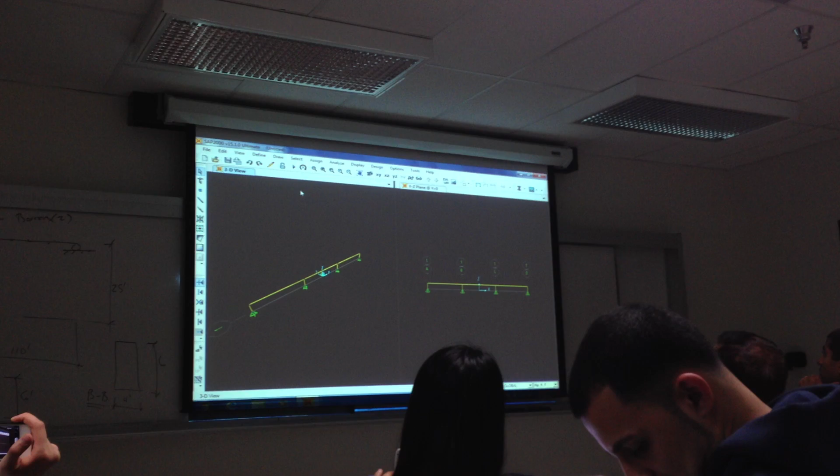Are we okay? All right. So I'll get rid of this one, especially because I'm not interested in the out of plane motion. So I click that off so I only see one picture. Now I go to view, click on show grid if you don't want to see all those A's, B's, C's, and D's, turn that off.

Zoom in a little bit, start rolling my mouse. And then obviously here we don't have columns, so right away I can just circle, grab that one and that one. It doesn't matter if I grab joints as well, it won't delete joints that are part of another member, but hit delete and then those are gone.

We want to see the nodes. So if we go to view, set display options, turn off invisible. Now we can see the nodes. The lengths aren't right yet.

Let's do that before we create the sections. This length is 150. So what I'll do, so they don't have some kind of mirror image, I could do both of these at the same time, one moving to the right 40, one moving to the left 40, but I don't know how to tell it to do both at the same time.

So I have to do one at a time. Select edit, move, and move 40 in the X direction, that joint. And then this one will do the exact same thing, move it to the minus 40.

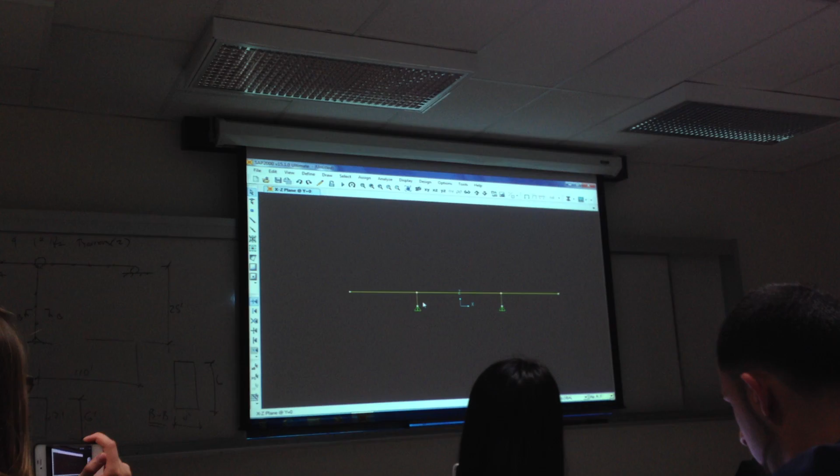I can see it a little more. So we have to move this one down by 10. So I click on that joint or circle it. It says down here 1 point selected. Edit, move, and make sure that it's showing still what I typed in before. So you got to zero that one out, and then on Z put minus 10. Okay, so at least all the lengths should be right.

So that's about how fast it is to create the geometry of a model. So you can right click and check, that's my preferred way. Go to location and it says that was 110. Right click on this one and the location is 150. So far so good, and this one says 110.

This column here is 35 feet, and then the next one should be 25 feet. Okay, so that's good. Obviously, there's no reaction here, that's a long cantilever, so we need to do something about it. We need to make that a roller.

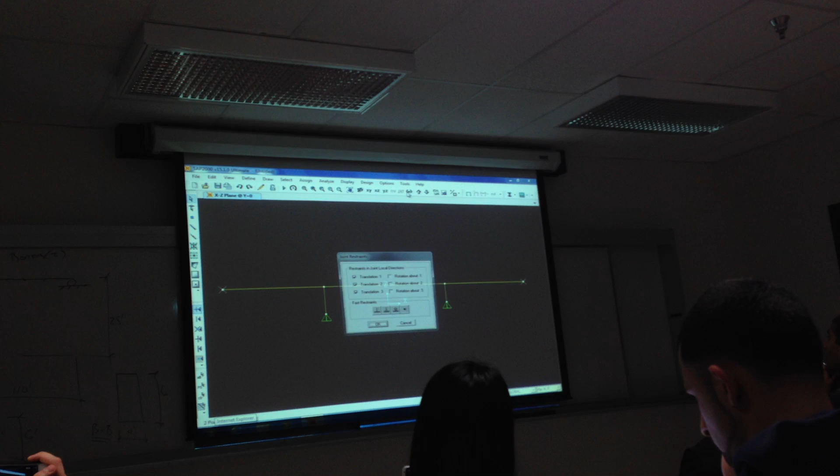So now you can grab this joint and this one. Down here it says 2 points selected, and say assign joint restraints. And what we're going to do is restrain. The X is what we don't want to restrain because it's a roller, we want it to be able to move in the X direction. Otherwise, it won't feel the earthquake at all.

We want the Y lateral. The Y is going in and out of the page, we want to restrain that. And the Z is vertical and sitting on something, so we want to restrain that. The Y, so that's fine. Rotation about the X, I want to restrain, I don't want it to turn. Rotation about the Y, I don't want to restrain, that's around the Y so it should be able to rotate. And then about the Z, it needs to be restrained.

So when we say OK to this, we should get the right icons which indicate rollers. We have a fixed condition here. So click on this joint.

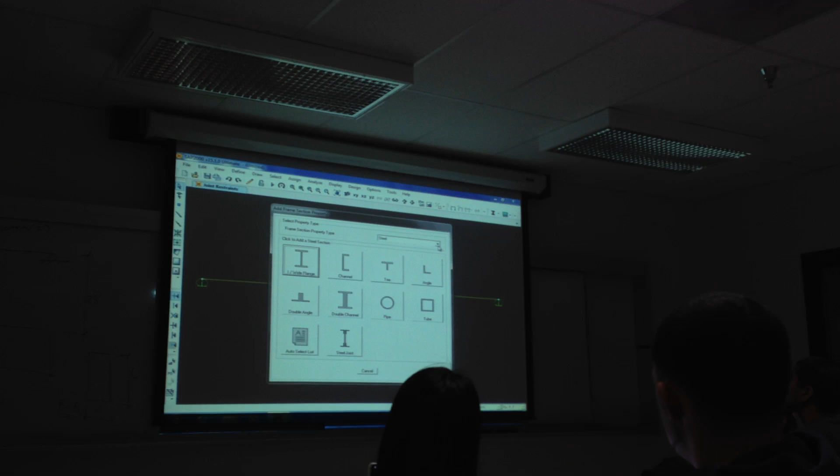So we're in feet units right now. Define section frame. Add new property. If you just leave it as steel, it doesn't... I don't like how this version does this, but if you go to concrete, it has some solid sections.

So let's go to tube first. We're using, I'll just assume that this material property is fine. It's a 4,000 psi concrete. If you have different concrete, you can create your own material or copy that material, modify it as needed, modify the modulus of elasticity. So here I'll put SUP for superstructure for the bridge itself. And then we want to change the depth to be 6 feet.

The overall width is 40 feet for this section. Flange thickness is 1 foot, and the web is 2. So top and bottom are 1, the sides are 2, the overall width is 40, and the depth is 6. That's this section here, right? It's superstructure. So we say OK.

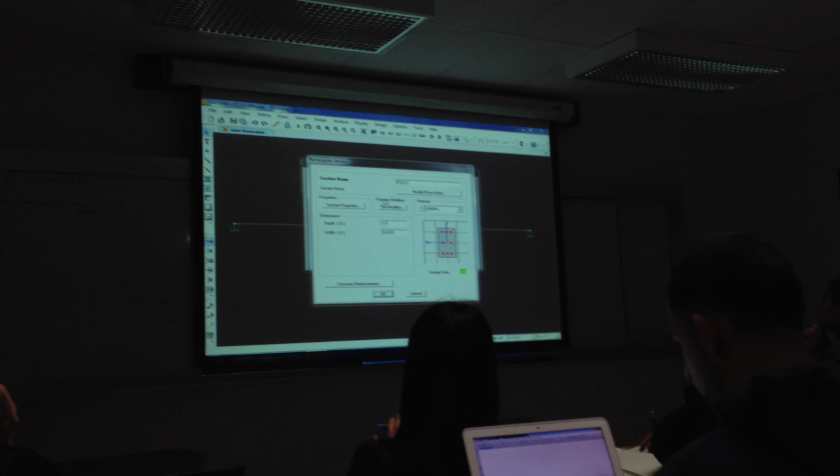So don't forget, after you create these sections, to assign them to frame members. It's easy to create sections and forget to assign them, so it just has the default. So now say add new property, rectangular. This is for, we'll call a column, COL.

And then, so you have to be careful which one's which direction. In the 2 direction, I think that's our longer one, that's 6 feet. And we can verify this in the depth is 4. That's the wrong way. Put it 6 and 4 this way. Okay. Because I know moment 3-3 will be the moment in this direction.

And looking at this, this is... oh, I was right the first time. 4 versus 6. Okay. So that is correct. So it's the weak direction in this direction. Okay, that's called column. And again, it's using the 4,000 psi concrete.

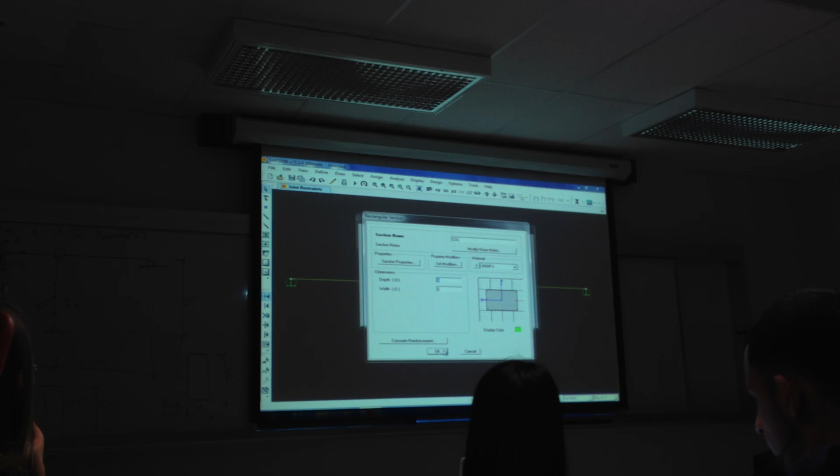Now you want to assign it, so I can just highlight around this. And right now we only have 3 members. We're going to split it up into 4 members. So let's say assign, frame, section. I'm going to select superstructure. So now it says SUP for all those.

And then for the columns, grab those and say assign, frame, sections, column.

Now if we wanted to define a different material property, you go define materials. Here's the 4,000 psi. So you can look at it and look at the modulus of elasticity. Remember, this is kips per square foot, not KSI. So you could get out, it says you could do it in units, I usually do it here. But kips in inches here.

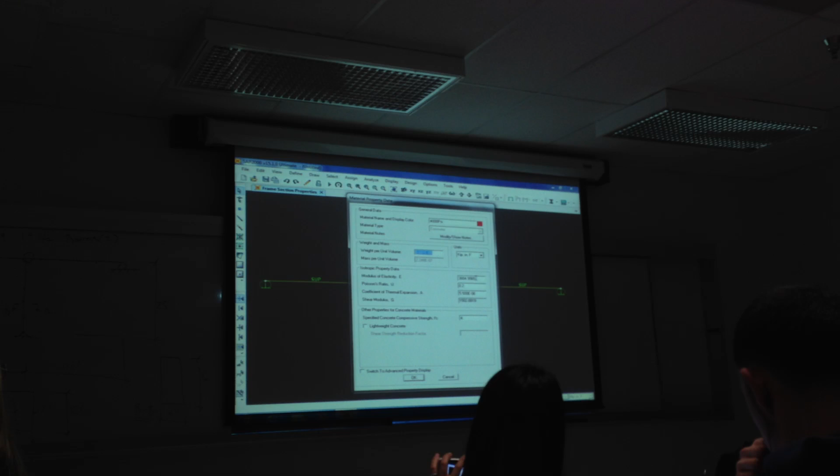Define materials, let's go back. And there's the 3,605 KSI, that's the modulus of elasticity that's found from 57,000 times the square root of 4,000. That's what that number is. So if you had a 5,000 psi concrete, you could find a new number and put it in here, or you could copy this. You could click on add copy of material and call it whatever you want, and then change these numbers.

And then when you go back to the section, when you go here, define frame section, let's say column, modify, you just select the new material you created. You have to create it first. It would just be the modulus of elasticity you would have to change, nothing else, in the way we're using it.

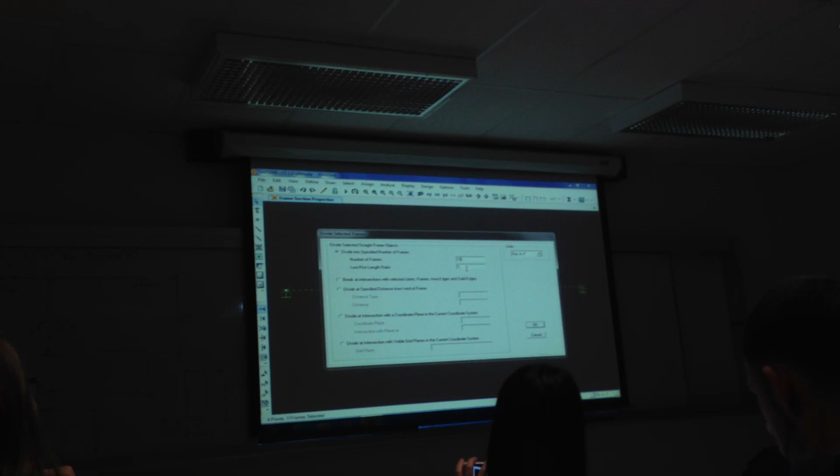Let's add some additional load. Or should we, let's split... let's see what I told myself to do. Okay, let's split these up into members. So 3 frames are selected, the superstructure ones. You say edit, edit lines, divide frame. And you say number of frames, and each one will be the same length, because the ratio of the last to first is 1. So each one will be 10.

Made up of a bunch of members that are interconnected. Columns, we're going to split into, what do we say, 5? Edit lines, divide, and just say 5. Leave that ratio as 1.

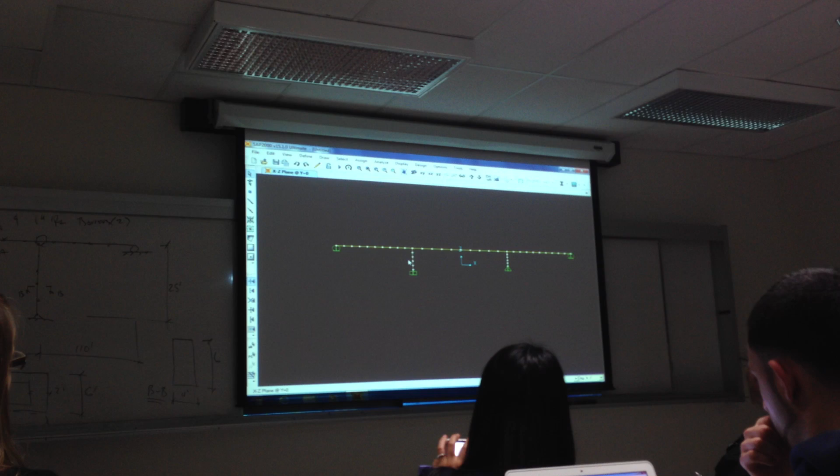Okay, so you can go in and look at them all, right? And then I click this, because we don't want to see that. If you click this icon, it gets rid of the section designation. So we have a lot of members now, and what else do we do?

Let's add some load and mass. We want to add, you tell me, how much I'm going to add, so many kips per foot along the top as a dead load. How much? How many kips per foot?

Two point four. 2.4 kips per foot. Because 35 pounds per square foot multiplied by 40 is 1,400, but that's pounds per foot along the line, right? And divide that by 1,000 to get it into consistent units, so that's 1.4 kips per foot. And I said also add 1 kip per foot along the line with 2 barriers, a half a kip per foot each. So that's, we want to use 2.4, right?

So I'm going to grab all of these, make sure you don't accidentally grab the column ones, zoom in, okay. And it also tells me here 30 frame members selected, so that should be good. Each one's 10, so I didn't accidentally grab the columns. I want to put that on there.

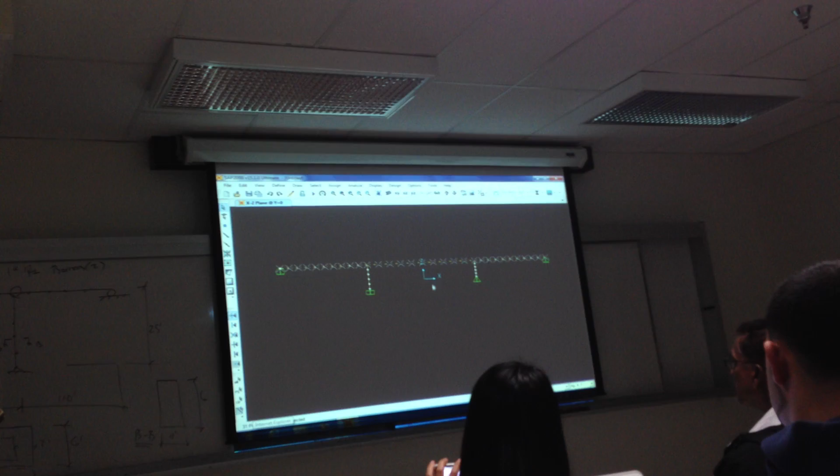And then say assign, frame loads down here. I'll go to distributed. It's going to put it in a dead load case, which is okay. It's add a dead load. We're going to include that. Gravity is the direction, so I don't have to put a negative. And then we just put 2.4 in, right?

Our 2.4 is kips per foot, and we're in kips and feet units, right? So it's showing it being applied there. And I'll click on this, and I don't want to see that.

Let's add the mass also. That's for dynamic considerations. It affects the periods, affects the dynamic response of your structure, so that added mass is there.

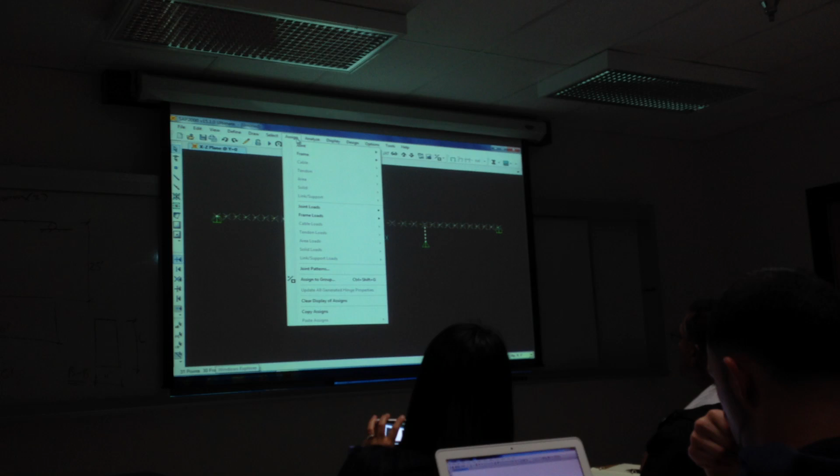So let's put that on there. We'll select again, we're going to distribute it. It's 30 frames selected, say assign. Now you don't go down to frame loads, just go to assign frame, and then over here, you go to assign mass.

We're not lumping the masses in each node, it will do that automatically for us based on what we do. And then this mass should be 2.4 kips per foot divided by 32.2 feet per second squared, divided by gravity. That gives us the mass per foot.

So that's 0.0745. Okay, so that shows it. Let's save it as something.

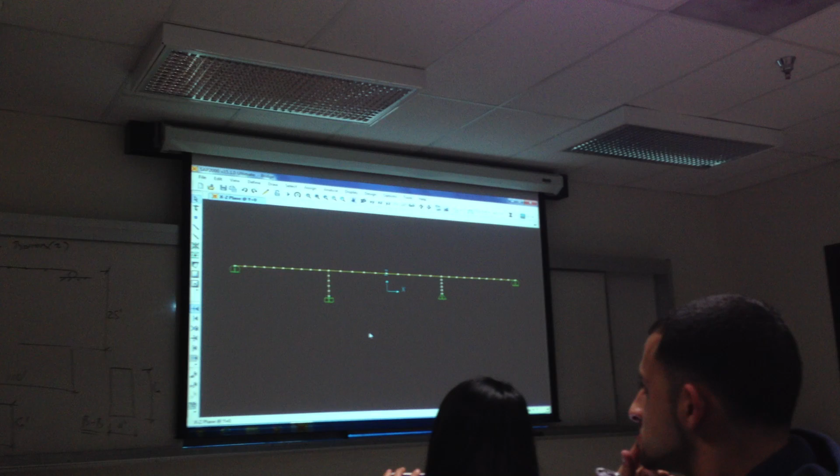Well, we already have this cross section going all the way to the intersection, right? So we don't need to add the total weight like that. We need to add the weight of this hole, and the mass associated with it.

So let's say it goes 6 inches on either side of the column. The column is 4 feet this way. So it's this multiplied by 5 feet. So what is that? Actually, that's quite a lot.

Probably pretty heavy, and it'll be, we'll put it on a node rather than distribute it. We'll put it at the top node. Is that clear what I'm doing?

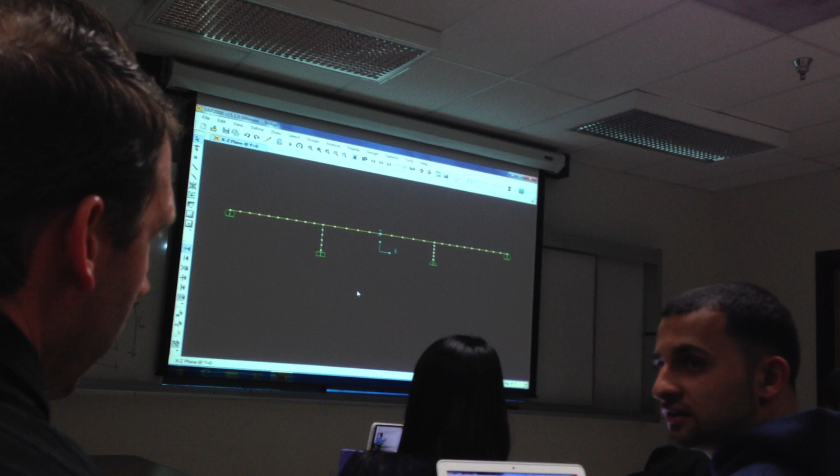No, actually, could you please explain? I just wanted to ask, what is it you're calculating? A solid bent cap. Remember how where the column reinforcement comes up, it's not hollow, the bridge, it will be solid.

Oh, okay, so I'm adding the weight that's not in there right now based on the cross section we gave. Yeah. When you did the frame line mass, did you do the add to existing or did you do the replace? I missed. It didn't matter because we hadn't given it any. Okay, so either one.

Okay, and so it's 40 minus 4, so it's 36 feet. This is 6 minus 2, so times 4 feet. And then the length, the column in this direction is 4 feet, but the bent cap will be another 6 inches on either side, so multiply that by 5.

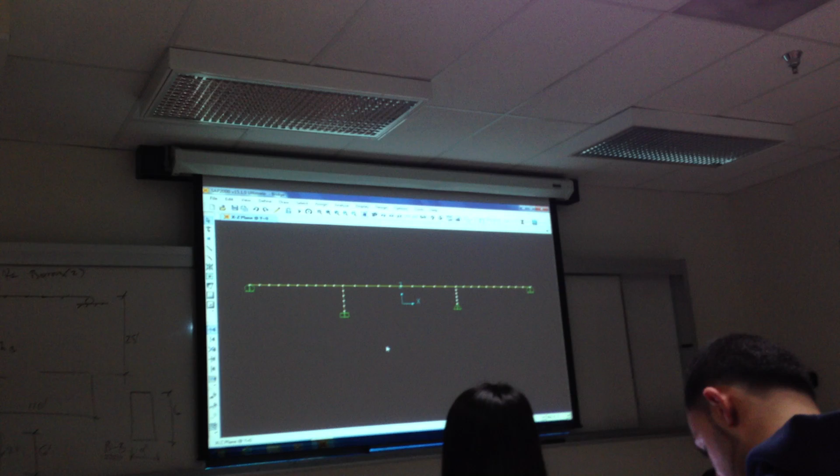So that's 720, multiply that by, it's 150 pounds per cubic foot concrete, and we use 0.15, so this is already in kips. So that's 108 kips that we'll put on it. And we'll do it at both locations, right there and there.

Let's say assign joint loads, forces, and dead. It says replace existing loads, I guess it's okay, we didn't apply any joint loads yet, so it doesn't matter. So you have to think when you do this, because you could be erasing, you could do things separately and adding them. Force in the X, force, okay, force in the Z.

So now this one doesn't say gravity direction, it says force in the Z, so you have to put a negative unless you wanted to pull up on the string. So it's minus 108. There it is, that's good.

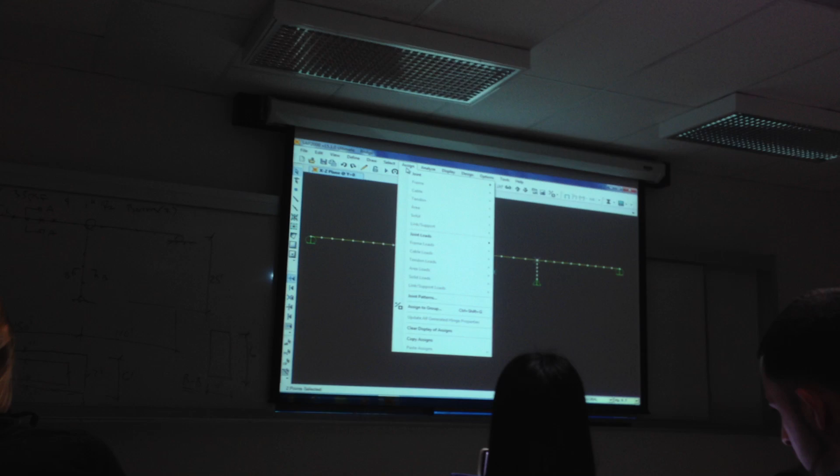And I want to click onto those same two joints and add the mass associated with that. So we're seeing different things here, adding loads and masses to members as well as to individual joints. Then I say assign joint masses, and yeah, it's in all three directions.

Let's see. I do need it in the one direction and three, the two direction. If I'm just looking at in-plane behavior, it doesn't matter, I don't need it, so I can leave that at 0.

And I'm going to take the 108 kips, divide that by 32.2, so it'll be 3.35. There, and there's a 3. If you want to do it in all three, that wouldn't hurt it. Okay.

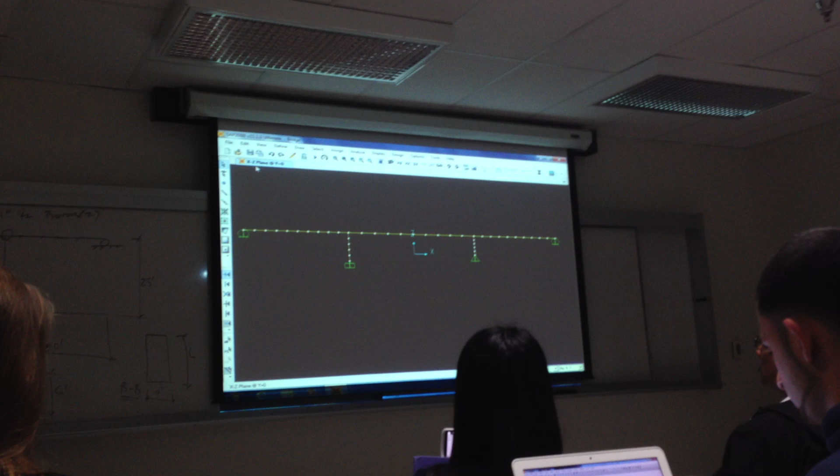Let's run this and see, and we're going to do some more things to it, of course, but let's just do this at the start. You can see that it's going to run the defaults. It'll have dead load and modal analysis, and the modal will tell us the periods of vibration and mode shapes, and that's important to earthquake response. So run now.

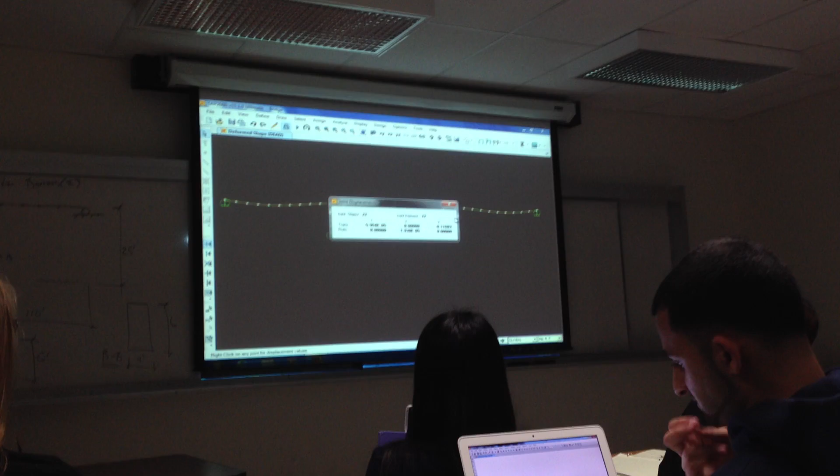This is the dead load. Let's go look here. Just under all the self-weight and the added dead load, we have the maximum displacement is about 0.1 something feet, so that's just over an inch of vertical. So that's reasonable. It's not 20 feet or something. You know you've made a mistake or you have a bad design. But an inch of displacement over 150 feet, that's not a problem at all.

And that inch wouldn't be there because when you build it, you build camber. So you do this calculation, and then you flip this diagram upside down, and you give that to the contractor, and they'll build that in the opposite direction. So under self-weight, it will just come down to the profile. Otherwise, you bounce across these spans.

Okay, now let's look at the modal displacements. So you click here where it shows displacements, and you go from dead, change to modal. And then it says mode 1, you can pick the other ones. Mode 1 is the longest period. That's in this direction. There.

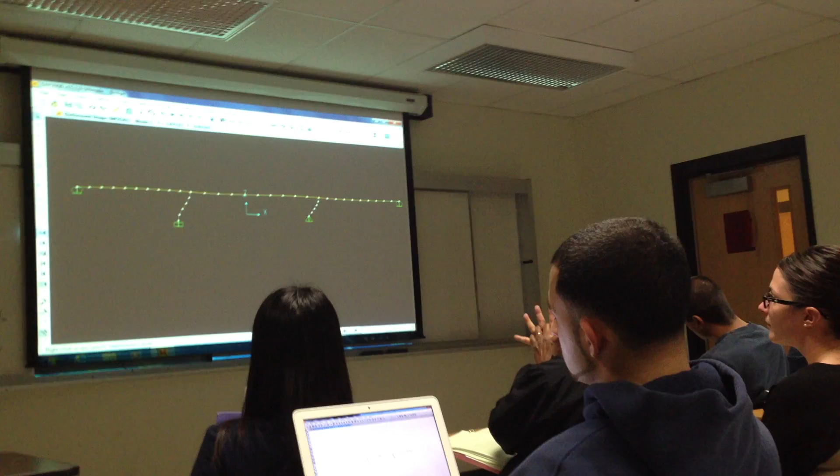On yours, when you're running it, you'll have animation. Somehow I've lost that. We worked on that large 30-story building and it didn't like it, so I don't have the ability to animate, but I know what it would look like. It just goes back and forth like this, the mode shapes. So this is mode 1.

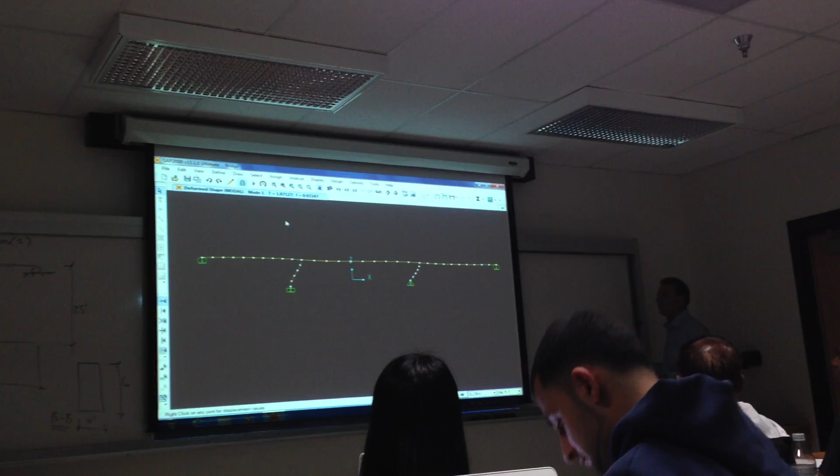It's over 1 second. The first one is just at 1 second, so it's just onto this. So it's pretty low. It's lower than the peak ground acceleration. So the ground acceleration is 0.7 G, and we're way down to 0.3 on the first period. I mean, that's the dominant period.

It doesn't mean the displacements are small, but the accelerations aren't that large. So under maximum credible earthquake, or maximum considered earthquake, the structure acceleration is only 0.3 G, when the ground is hitting 0.7 G. It's a de-amplification rather than resonance. It's like an anti-resonance. It's actually reducing the accelerations. Whereas if the mode 1 period was here in this region, it would be amplified by two or three times.

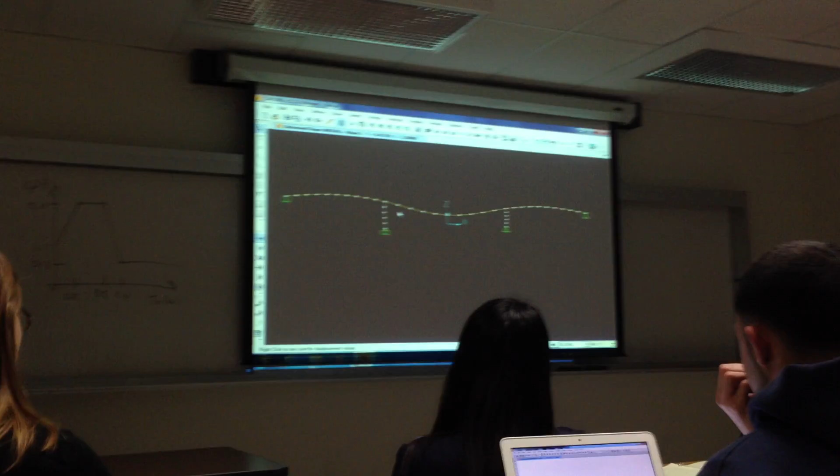Okay, but that's mode 1. And mode 2, look at that. That's this type of displacement shape. That's the second mode. It's 0.45 seconds. So that's way up here. So the second mode will have very large amplification, the largest possible based on our chosen ARS curve.

Mode 3. Now mode 3 you can't see, and that's because it's probably going in and out of the page. If we rotate this, you would see that. Let's see. Maybe 3D. I can rotate it. Yeah, so it's moving horizontally.

We didn't restrain that. So one of the things I want to do, at least in my work here, is get rid of the mode shapes that go in and out of the page. We're not looking at that. So let's unlock it. Let's view it. Set 3D view. I'll change this back to 0.

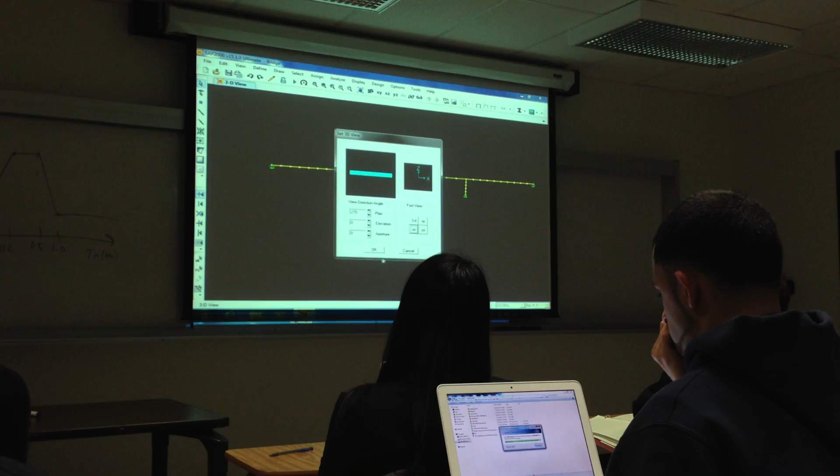And we'll look at it in the X and Z direction like that, so it's directly sideways. And then what I'm going to do—I don't want to mess with these restraints we've already played with and we're happy with—but all of these other nodes, I want to restrain to move only within the plane. So I'll grab them like this, and then I'll go in and grab these ones as well. Every single one, I'm going to do it all at the same time.

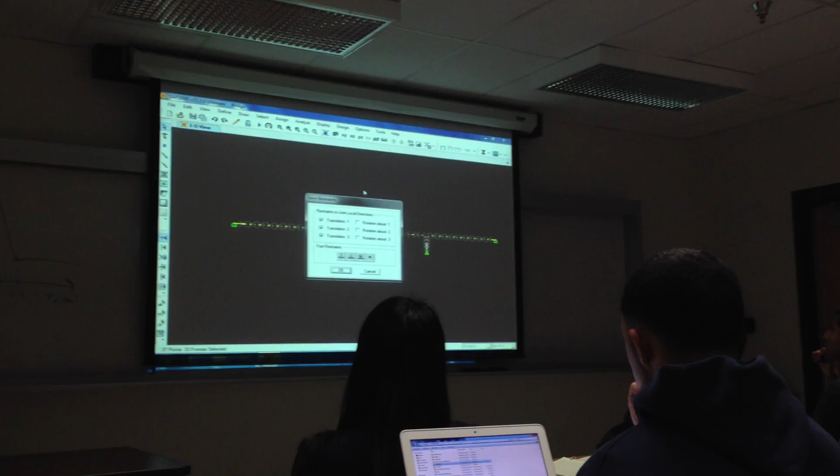Assign joint restraints. I don't want to restrain the X, so turn that off. I do want to restrain the Y, that's out of plane. The Z, I want it to be able to go up and down—it's in the span, it should be able to go, not just horizontal, it should go up and down. Rotation about the X I want to restrain. If it's acting in the plane, that shouldn't be occurring, and rotation about the Z similarly. Rotation about Y I don't want to restrain. So it's triangular X marks for this type of restraint.

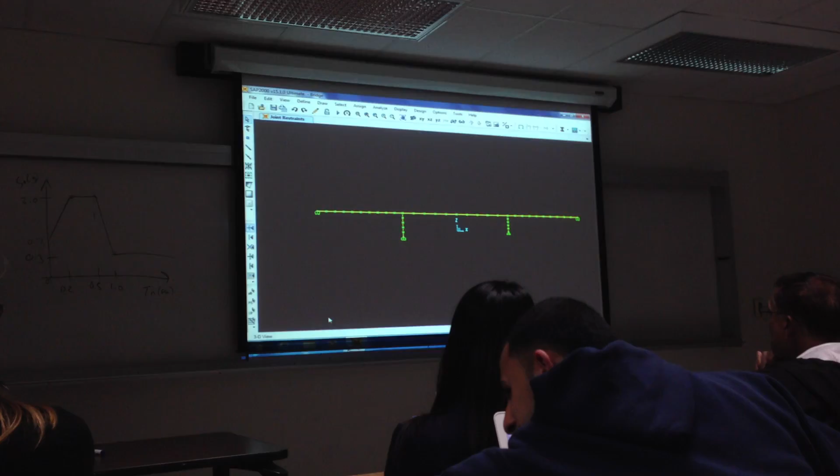Okay, and then they're little symbols, which are kind of annoying, but they serve the purpose. So now let's run it again, and you'll see that those other mode shapes are gone. Now all the mode shapes are the ones we're interested in.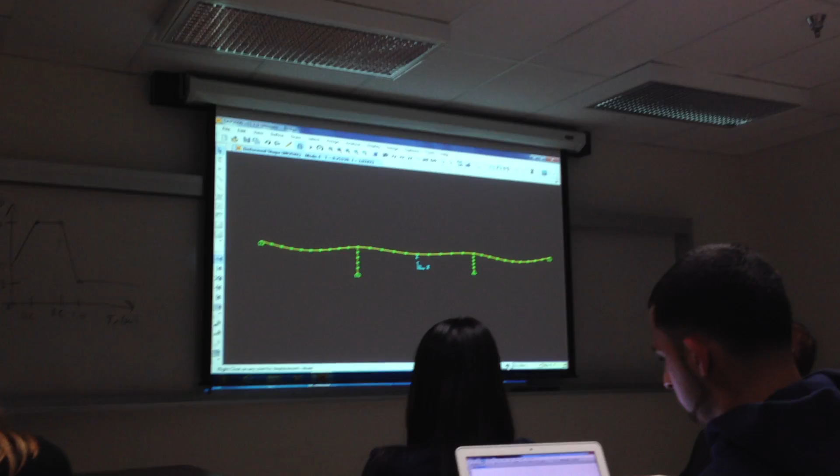So mode, that's mode 3. Let's go back to mode 1. Okay, so the same mode, 1.07 seconds. It's primarily deformation of the columns and some maybe of the bridge superstructure. Mode 2 is 0.45 seconds as before. Mode 3 now, we don't get that mode out of plane, we restrain it, so it's all behaving this way. All these modes we've seen here would also be in the other one, but we've eliminated any modes that are not important to our project. So in an earthquake, all of these modes are going on, some greater, some lesser, depending on the excitation, depending on the actual earthquake that comes in.

Okay, now that we have the mode shapes, let's unlock it, which throws away all the results. You have to unlock it to make a change to the model. Now we're going to add the spectral plot, and then look at those results, and then go from there.

So you say define, functions, and then the function is a response spectrum function. And here is where, when we get the actual motion that we post, you could say, let's see, from a file, and then you've saved it, and it says where, you go find it, and then you apply it. We don't have a file, we're going to create it, so we go down here, user, and then add new function. And then you can call it whatever you want, function 1 is probably fine.

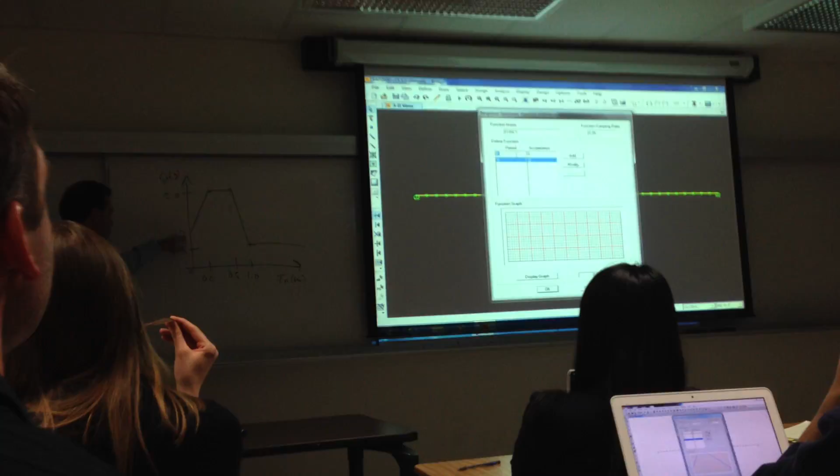So at 0, it's 0, add, that's at 0 period, that's here, we're at 0 acceleration, and I'm doing it in G like this, and then we'll have to scale it by 32.2 to get it into real acceleration, feet per second squared.

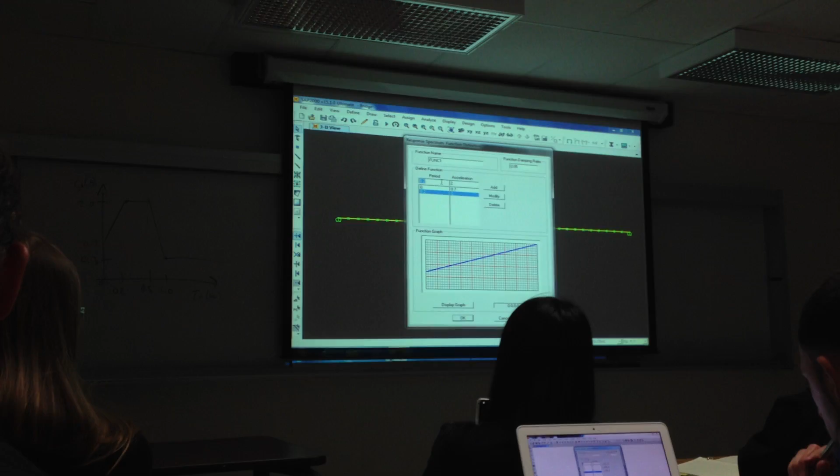At 1 second, it's 0.3. And let's just put 1 and 2 seconds, so it knows where to go to continue. It'll continue that line, the last line. Is this right? Yeah, this is a 2.

Now what we do is we want to run the analysis and define. Load case, add new load case. And then over here we're going to do a response spectrum analysis. And then this says CQC as complete quadratic. Complete quadratic completion? No, I don't know what it is.

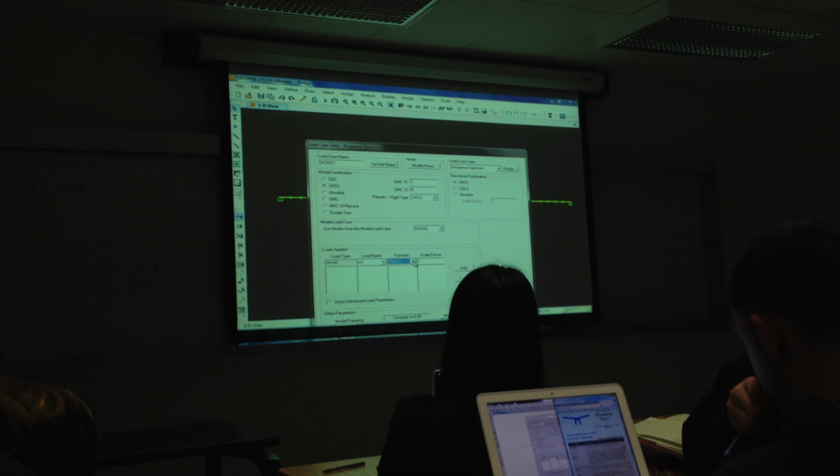But my point is, don't click on that, put SRSS. And so we go to acceleration in the one direction, which is U1, the X direction, that's the direction I want. Wherever my bridge is hiding now, under there, it's in that direction. And it's function 1, right? That's what we just created. Scale factor, this is where we want 32.2. I want, because it was in G, I wanted it in feet per second squared.

Say add. Okay, and then this is important. Damping, if we're doing linear elastic analysis, which is what this is, use 5% damping. If we're doing nonlinear analysis for concrete, I would, if anything, recommend 2% damping on the modes. So if you get to the point in your project where you're running nonlinear time history, don't use 5% damping. It's too much, because the hysteretic damping is already providing that 5%, so you'd be using it twice, essentially. The reason that in linear elastic analysis people use 5% damping for structures is because they're not modeling all the energy taken out of the system by the hysteretic plastic hinges. Okay, but so this says constant for all modes, 5%, so that's fine, looks good. And we'll say okay.

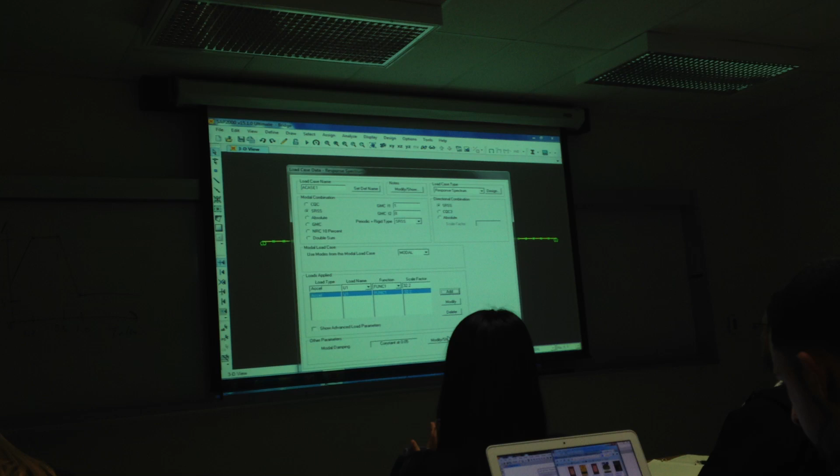Any questions so far? Everything's clear?

Run analysis. Now you could have called it whatever you want. The default said Case 1, I didn't change it. So it's the response spectrum linear elastic analysis. And then say run now.

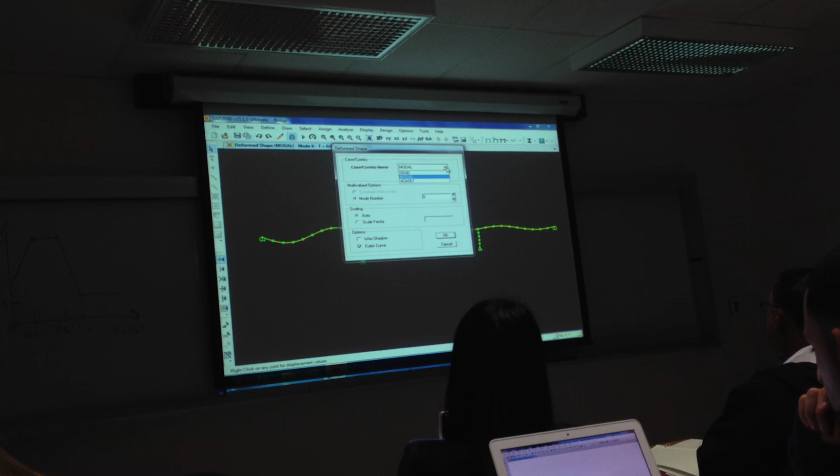That's just a modal response, so I'm not interested in that now. We've already looked at the mode shapes. Let's go to Case 1. This is the displaced shape.

It's interesting because it's taking squares from different modes, adding them, and taking the square root. What happens is certain things end up looking funny. It's kind of hard to see here, but you can see that the superstructure kind of looks like a kink and then it goes like that, right? Rather than continuous. And that's because any response from an individual mode will look continuous. What it's doing is that square root sum of squares, or whatever, it's taking the displacements from all of them, squaring them, adding them, taking the square root. And because of that, you lose that nice continuity.

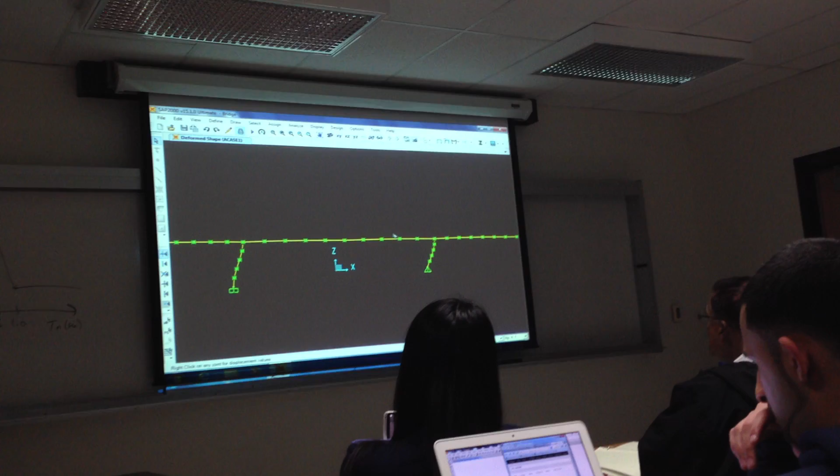So if we amplified it more, it would be hard to see because this would be amplified too, but it goes like that, we'll often see that. You see the same kind of thing here. But if we looked at the response from any one mode, it would have a nice continuous look. From time history analysis, you won't see that. You'll see the superstructure continuing like this and not having a kink. You don't actually have a kink. So these are just maximum absolutes.

So let's say you click on this one. Let's go to this joint here, and we have a maximum. Look at the moments.

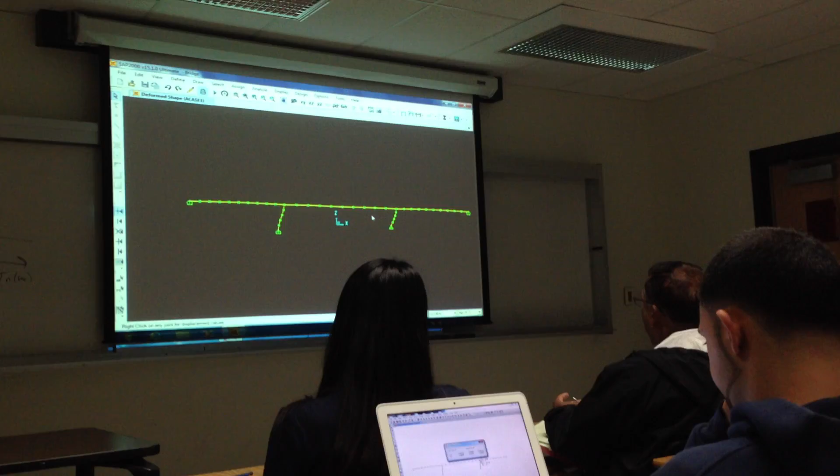That's under dead load. This is the spectral, so moment 3 is what you're interested in. Those are the results.

And for the same reason, rather than the moment diagram continuing through like this, like you would expect normally, where it goes through zero and is positive and negative, here it's positive and positive for the same reason: squaring, adding, and taking the square root can only give positive values, they can't give negatives.

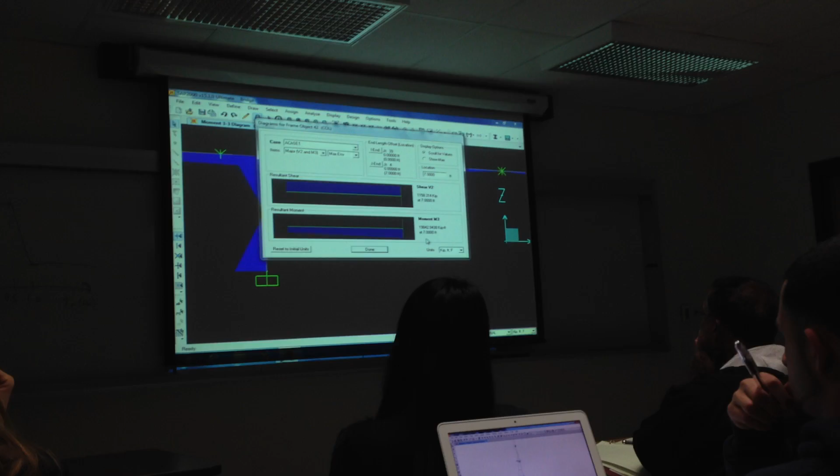So if I right-click on this, you can see that it goes up to 21,000 kip feet. Now remember, this is broken into 5 elements, 5 members. So if I right-click here, I'm only looking at that central part from here to here. I have to actually go up to this member, click on it, and then the top is about 19,000, 20,000 kip feet.

Now that's 20,000 kip feet. When you're designing your columns, you don't design for that, right? You divide it by a Z-factor.

This one here is pinned at the bottom, and has a different stiffness because it's a different length. If we right-click at the top there, it turns out it's similar, 19,000 something kip feet, and that's just coincidence, or maybe a good design. But there definitely is a big difference in transverse stiffness—one's approximately 12 EI over L cubed, the other was 3.

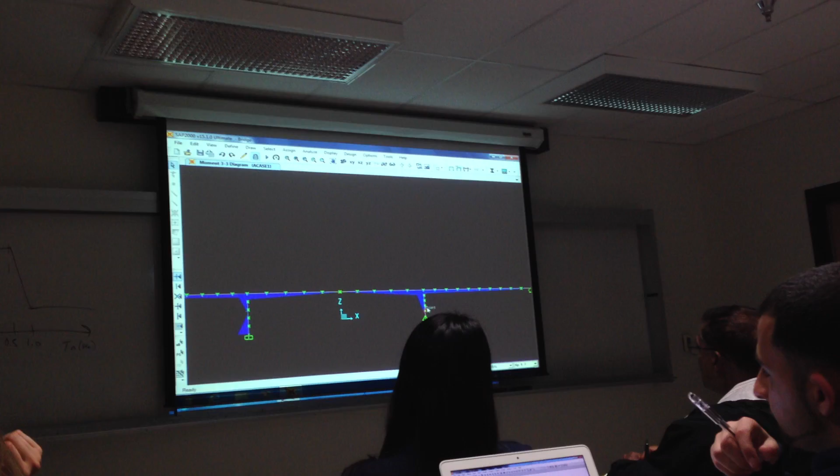But then one's pinned and one's fixed. So, I mean, that's a different length, and when those two things come into play, it turns out that the moments at the top are approximately the same, so similar overall lateral stiffness. Because it's L cubed and they're different lengths, so actually that wouldn't be a bad design.

So let's keep going.

Now let's try to run an earthquake. Let's try one other thing first. We didn't run, let's add dead load to it.

So let's say define, load combination, add new combo 1. Case response spectrum, scale factor, I'll say add, and this is a linear add, and then dead load, linear static, scale factor 1. You can scale these different amounts if you're looking at load factor design and multiplying things to get ultimate moments. So I'd say add—in this case it's just going to add the spectral results we just got and the dead load.

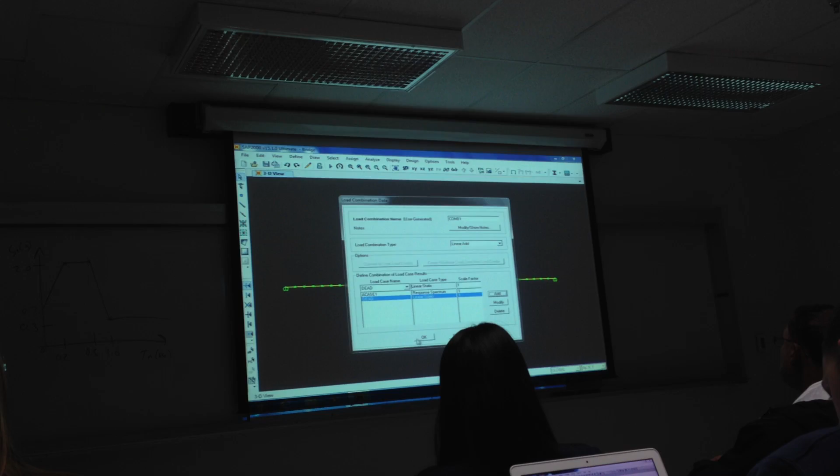So, okay, I'll rerun this before we do the time history analysis. So that's just case 1. But now let's go to combo 1, moment 3, for example.

So now you've seen the moment diagrams are plotted upside down, so you can go to options if you want to plot it the way I normally plot it. Click on this and it switches the way the moment diagrams are plotted. I'm not sure what all these colors are, but let's go here to the bottom.

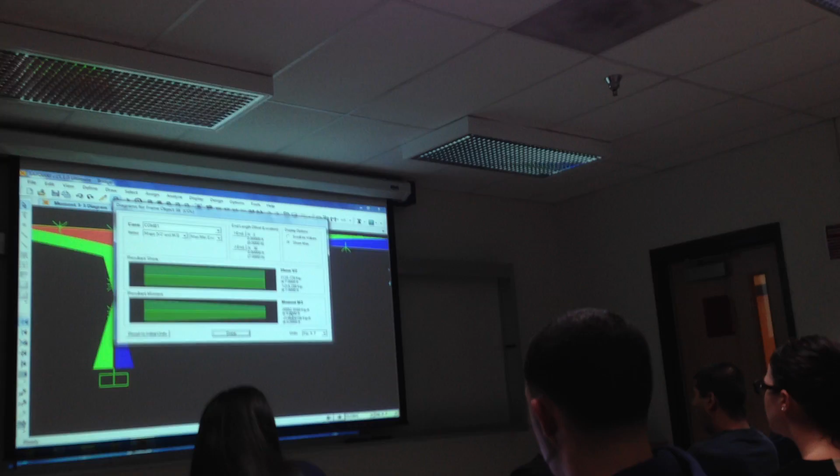And so now you can see the moment is 20,550, something like that. So I changed the moment in the columns a little bit. Of course, it changes the moment in the superstructure quite a bit because that's all where the dead load is occurring, added to the other things.

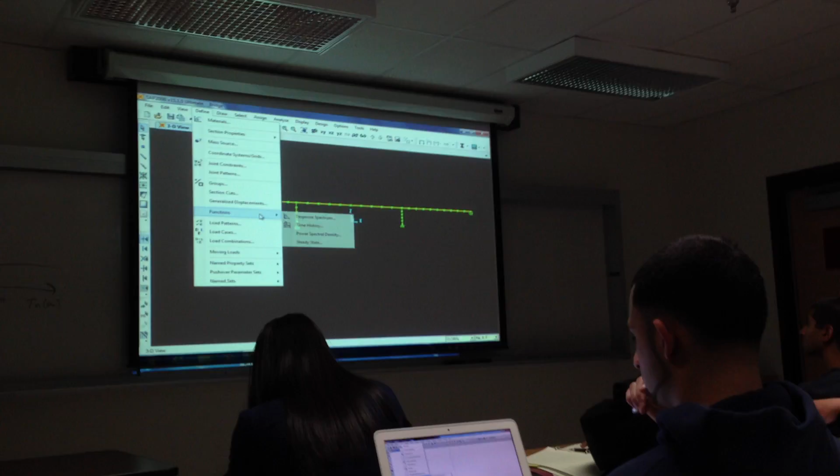Okay, define function—let's bring an earthquake in now. Time history. So this is a function, just like response spectrum; we did create a function, but this has thousands of data points, so we're not going to type that in—we're going to bring it in as a file. So say from file, add, use function. I have to browse for it. I'll call it EQ, EQ1. Browse, and then it's wherever you store it. I'll give it to you on Blackboard.

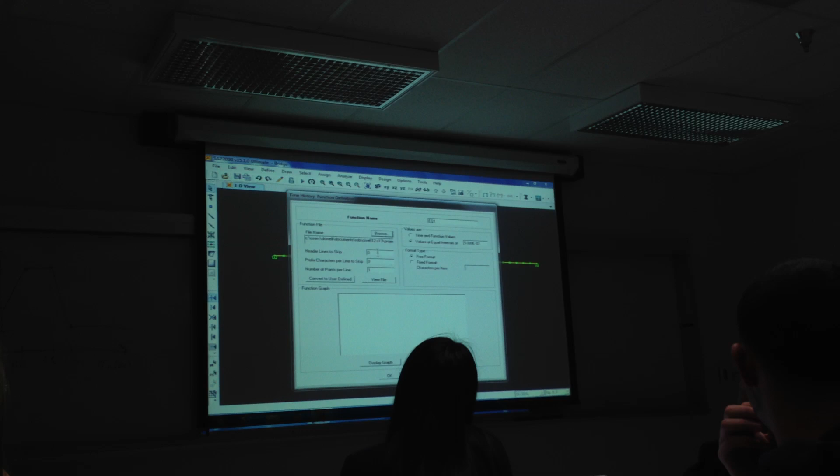To see why it's wrong: okay, so first of all, we didn't tell it to skip this word, so it's reading that—that's probably the problem right there. And also, it's not 0.005, it's every 0.01 seconds, so that's 2 bits of information. While we're here, let's go down to the bottom and see—okay, so 61 seconds at 0.01.

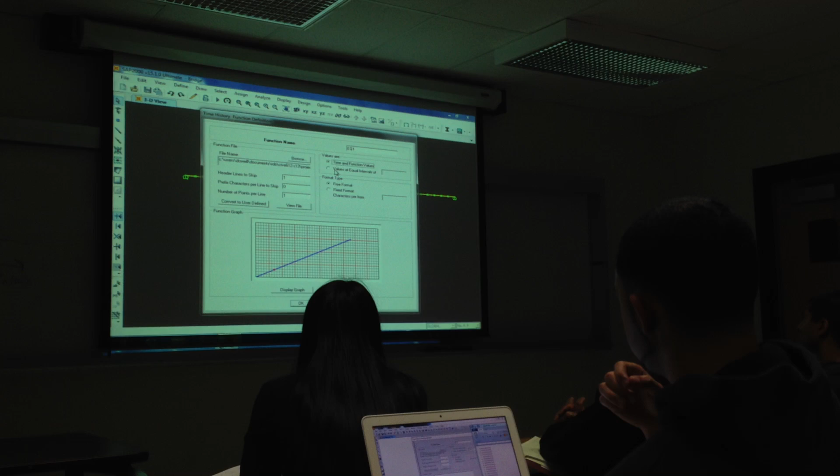So here you say number of header lines to skip. It said 0, so it should say 1. And here it has time and function values rather than just one column of data. And now display graph. That looks better, right?

We go out here. This is about 61 seconds. And this is in, if we look at view file, it's in G. So we're going to have to amplify this or magnify by 32.2 as well, or scale it, I should say.

Okay, so it's called EQ1. I'm just moving across and looking at the numbers down here to make sure that it really looks like G values. 0.3, 0.2, so that looks reasonable.

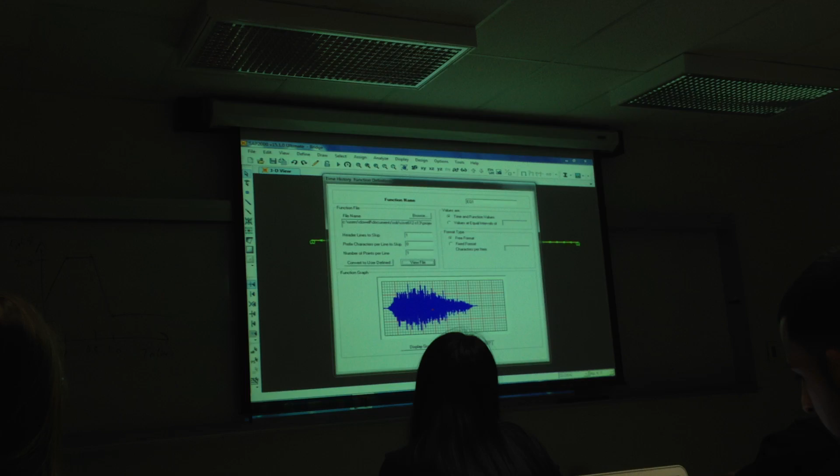So it's an earthquake with a lot of motion. See that? It's not just like one big motion and then nothing. It's for 60 seconds, it's got a lot of motion. So let's say, okay, let's see what this can do for our structure.

Now what we're going to do is say define load case. So just like response spectrum, we have a new load case, add new load case, and right now we're going to do time history analysis. We can do modal. If you're doing linear, you can do modal.

If you do non-linear, I don't recommend that. We'll try both modal and direct, and we'll see you get basically the same results.

Load is an acceleration. It's in the U1 direction. Earthquake, 1. Scale factor is 32.2.

This will be, I want an output at 0.01 seconds at each time. How many increments? 61 seconds, so 6,100, right? 6,100.

Because we're doing modal, we can just say constant 0.05. So this is comparable to the spectral plot. And linear elastic, it's going to do time history, but it's going to use a modal analysis to determine time history.

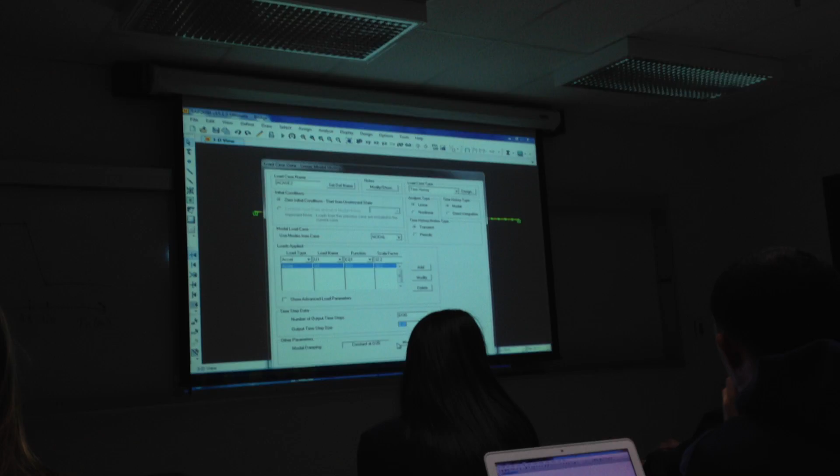So it's not going to be doing the squares of each maximum from the motion and adding to the square root. It's going to actually do the time history from each mode and add all those results together using a modal analysis. So it should give almost identical results to the direct integration.

Let's call it time history linear elastic. Then from there. Okay. So we'll run everything.

So it's running. It's done. So it's pretty fast using the modal approach.

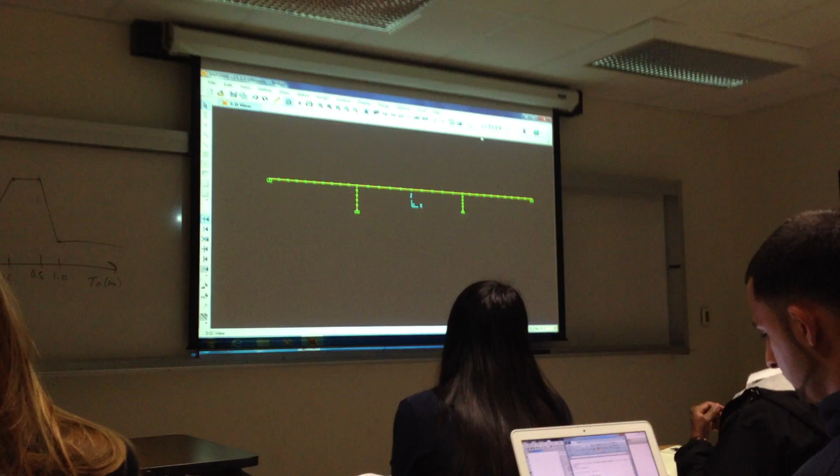And then, let's see. Let's click this. Probably, you could click through here and go to time history and start at time 0, and then you could click.

And then you could click like this, but it's changing the amplification. But it would take 6,000 clicks to look at it all. So there are different ways to look at it.

When I was clicking through, it looked like it suddenly jerked, and what it's doing is the scale factor. Look at that, it's huge scale factor. So it's automatically changing it. So rather than continually moving like this, it suddenly jerks or it goes. It looks like it's going back when it's not.

You could set this to a number, but it's so large, it's such a small motion that the ground is just starting to move right now. So perhaps a better way to see what it's doing, you can create a video of it and then actually watch it run. So that's a good way to do it.

The other way is to click a node. Let's say this right here. I'll right-click that one, and that's node number 4. And then we can display the results over time for that node.

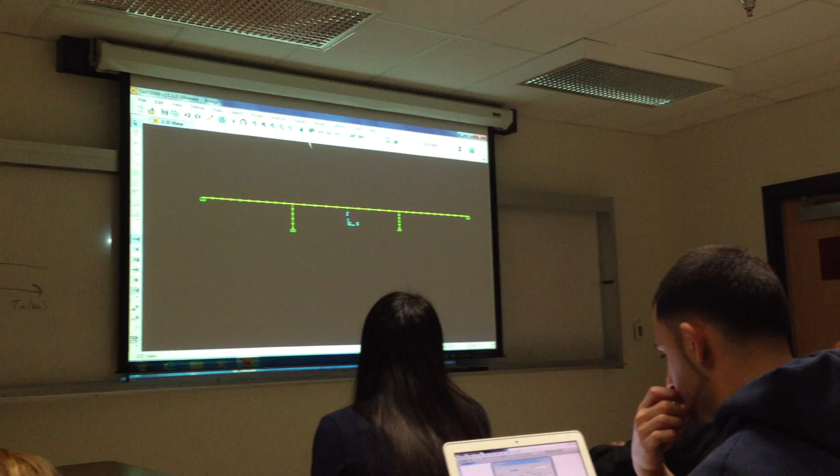So display, show plot functions, define plot functions, and then go to joints, add.

Is the displacement over time. So this is more, right? We're getting almost a foot of displacement. You can see 0.8 or so.

That spectral was only 0.2 something. So we're getting from this earthquake, we're getting, this is considered a maximum credible earthquake. It's a larger earthquake. It's actually one of the earthquakes I'm using on my 30-story building. So it's why my building is 5.5 feet. Now you see why.

But let's see, yeah, it's about 0.8. So anyway, this is the displacement over time.

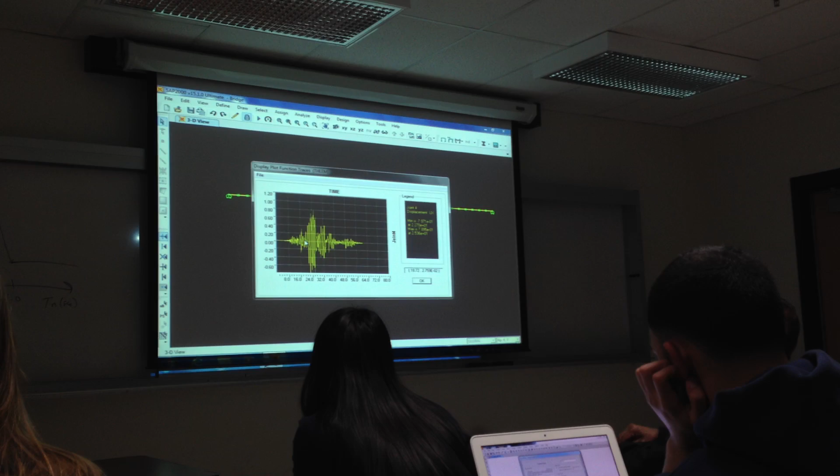If you want to window in on something of interest, let's say between 18 and 30, you can go back to here and say 18, 30. And so you can get a better feeling for the response over time.

Okay, let's look at the acceleration. Let's look at that one. Show plot function, so I'll get rid of this one and bring in 4.1.

And it says here acceleration. This is just in that zoomed in window, but you can see that it's interesting. It's not 2G, but it is above 1G. 1G is 32.2 feet per second squared, and we're getting 40 something this way.

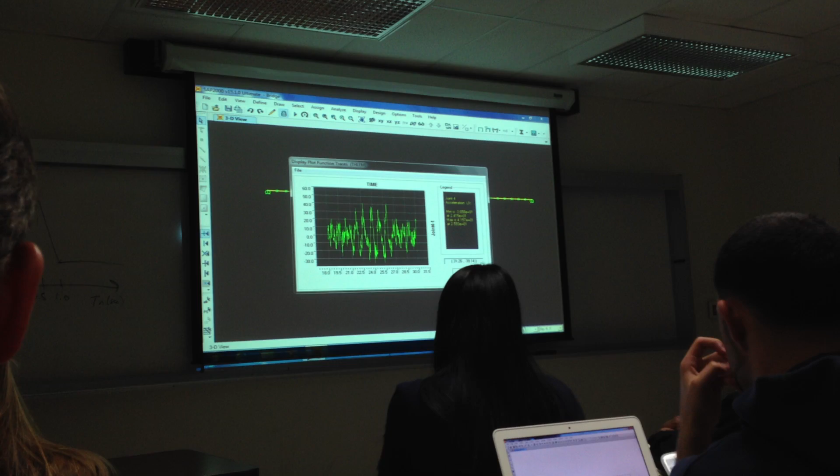Is it relative or absolute? Yeah, that's a good question. I wasn't sure. It says relative, and what we're really interested in, what he's saying is when you go to

Define for joints, and we put in joint 4, I kind of hesitated, but you can click on acceleration. And for displacement, that is what he wants, relative between the ground and the top. But for acceleration, this is that, and then this is absolute.

Really, we're interested in absolute acceleration. That's what that spectral, that's what this is. It's the absolute acceleration. It's the mass times the absolute acceleration of the force, not the relative acceleration. So let's try this and see what we got.

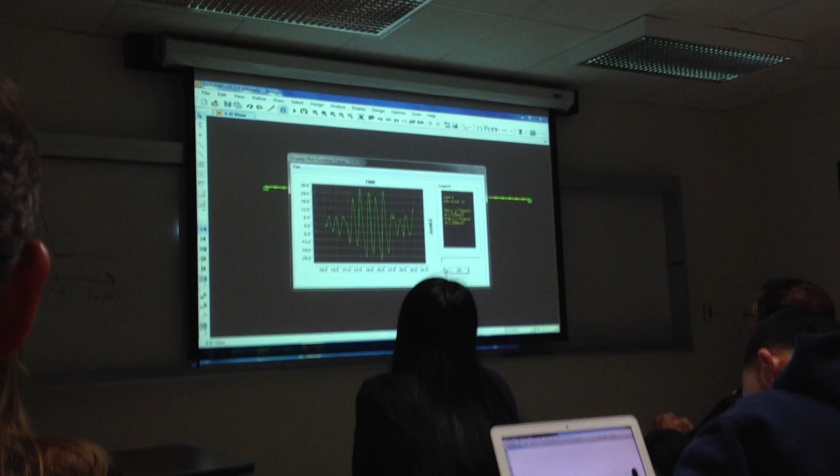Yeah, see, it's still about 30. That's the absolute acceleration, so that's interesting. We're getting more displacement, but less acceleration. Well, I guess not. When we looked at the spectral plot, the first mode was here, which would be 0.3, and we're above, that's 0.3 G, we're above 1. We're at about 1 G in absolute acceleration. So it is higher, both acceleration and displacement.

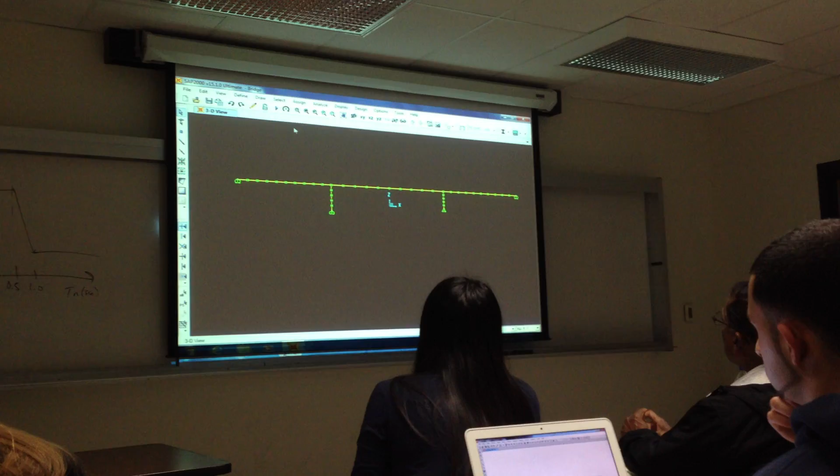Now what? Okay, let's unlock this, and then go define, load case. I'm going back to this, and then I'm going to change it to direct integration, but still leave a linear elastic.

And there's one other thing we want to do. When you run, this is good for nonlinear analysis. It won't matter so much here because you could just combine it. But for nonlinear analysis, the dead load has to be on there before it goes nonlinear. Otherwise, it'll go nonlinear at the wrong time. The moments, the axial force, everything else is really on this column plastic hinges. So what you do is you say,

Load pattern, dead load. You don't want earthquake. You want, otherwise you would be applying the dead load with the waveform of the earthquake. So you have to be careful. The ramp, time history, and scale factor is just 1, and then say add.

So we'll go back and look at ramp time history, and then the earthquake is occurring as well. And then we're going to do a direct integration. Say okay. Let's go back and define functions, time history. What was it, ramp? Right. Okay, modify. Okay, that's what I want.

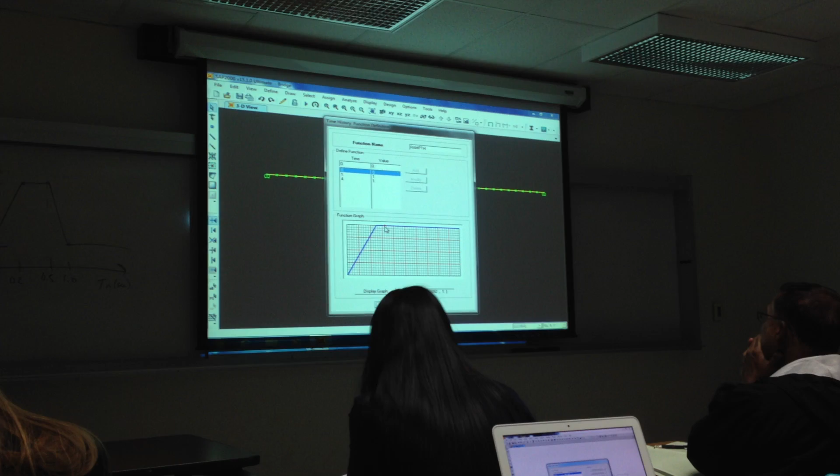So it's applying the vertical, the self-weight over 1. It's like having it sitting on false work, and you strike the false work, you remove the false work over 1 second, and now the dead load's on there. We're starting the earthquake at the same time. So then it just stays constant. After 1 second, it stays 1.

But if you go back to load cases, the earthquake is starting at time 0, and the weight is starting at time 0. But after 1 second, the earthquake hasn't done anything. It's really small, so it doesn't matter. You could, if you wanted to be technically correct, take the whole earthquake record and shift it to the right by 1 second. So have it start after 1 second, in other words. So that you put a dead load on for the first second and then the earthquake. But the earthquake, nothing much happens in the first second. So it's fine to do it this way. As long as by the time the nonlinear events are occurring, all the dead load, moment shears, and axial loads are on the structure in the right place, then it's correct.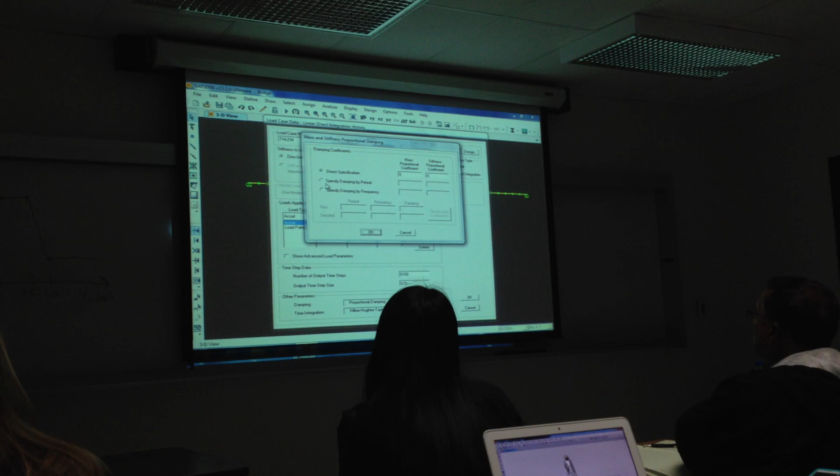In this analysis, you no longer can say, I want all my modes to be 5% damped or 2%. You have to do it some other way. You have to do the damping because there aren't any more modes. It's not using the mode shapes now. So it can't help you with that. So, but you still want to remove, there's still damping going on.

So what you say, I would click on specify damping by period. What was the longest period? About 1 second, right? So I would make this a little bit larger, 1.25. The bottom one I keep at 0.1. And we'll say 0.05. It's not in percentage, it's actual damping.

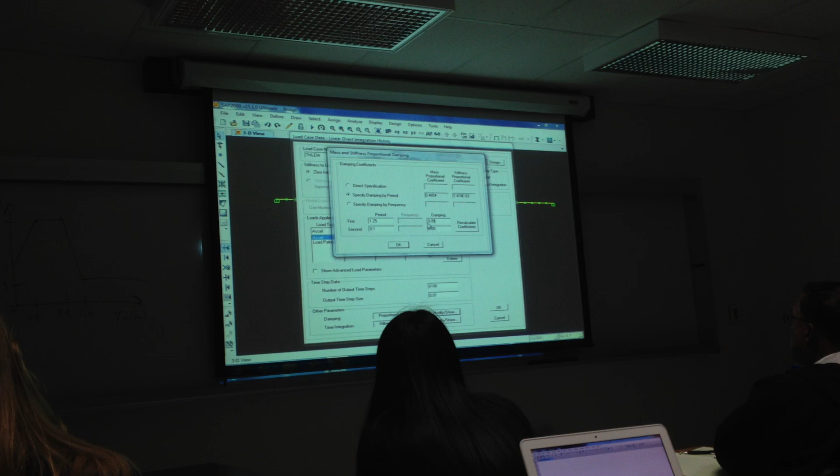Like that. Is it using constant damping or like? It's a combined stiffness mass, really. So it drops down in between and then goes up. And in the middle it's a little less, and then on the outside it's a little up. So by putting bounds on the period at 1.25 and 0.1, you'll probably only want to use periods that are less than 0.1 so that you don't dampen out the behavior of the system and take energy out of the system.

Well, actually we're not using the mode, so I take back what I just said. So this should be fine.

So this will take a little longer because it's direct integration versus using the mode shapes. You can see us running.

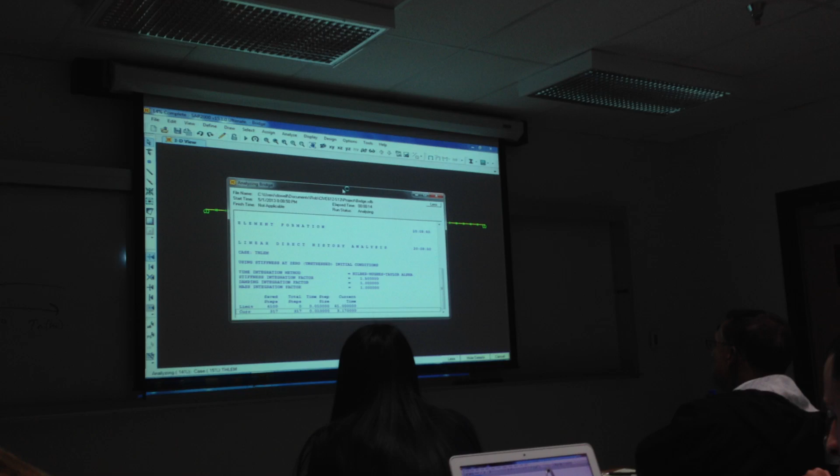Is it a real earthquake? Yeah. This was given to me by Geotech for the project that I'm working on, so there are 14 different earthquake motions. I don't know off the top of my head which one this one is. Now that I think about it, I think it was generated from a real earthquake, but then modified to give different frequency content and all that. But like I said, I didn't generate this or develop it. It was by the Geotechs that are working on the project.

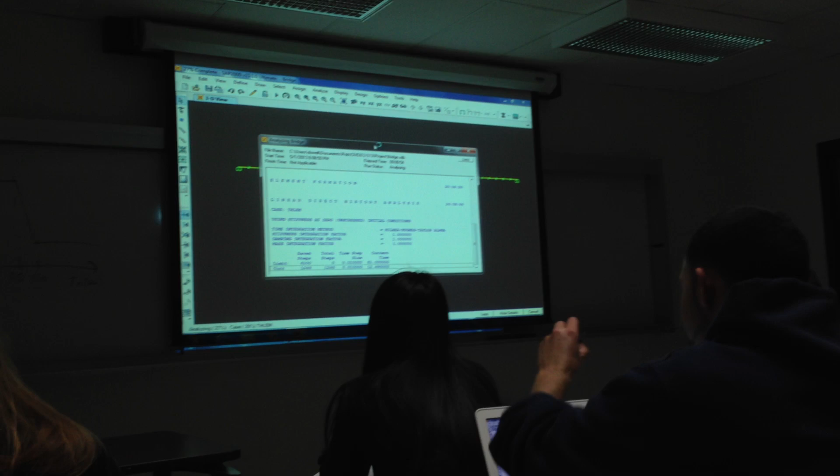You could go and look, see what it is while this is running. Let's see what it looks like. I think I have it.

This computer. It says 7 time histories, but there are actually 14. This particular one is this one. Let's see if this tells us that.

Not a lot of information there. It's called, I changed the name to that. It's spectrally matched time series, but it's a maximum credible earthquake Kushiro. That tells you anything. That's the particular one we're looking at. But it does say spectrum matching.

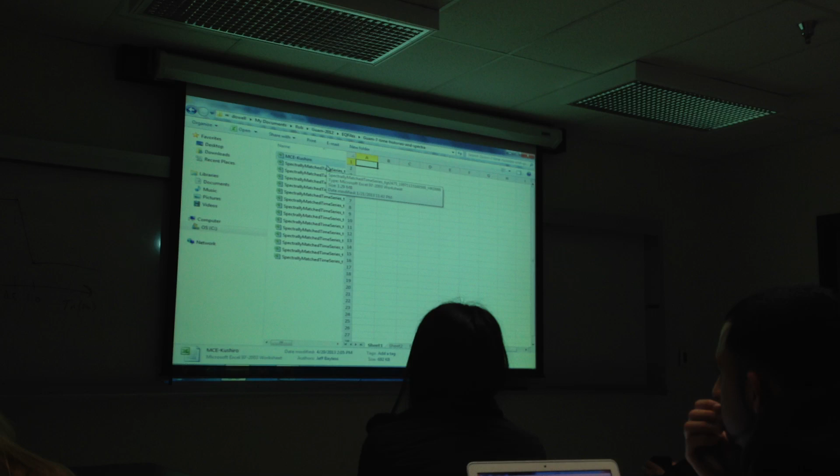So what happens is they take a real earthquake and then they modify the frequency content and the amplitude so that it more closely matches some spectrum that we're interested in, some high level. That explains why it's so large, such large motions back and forth over a long time, rather than just 1 or 2 big spikes. In other words, it's probably more damage to the structure than would actually occur in one earthquake, representing a bunch of different possible limits.

Okay, we're halfway there, so we won't get to nonlinear today. We'll keep going and try to, what is today, Wednesday the first. Hopefully by Monday we've got the issue resolved. I'm still working with those guys, and so we can all go over it Monday.

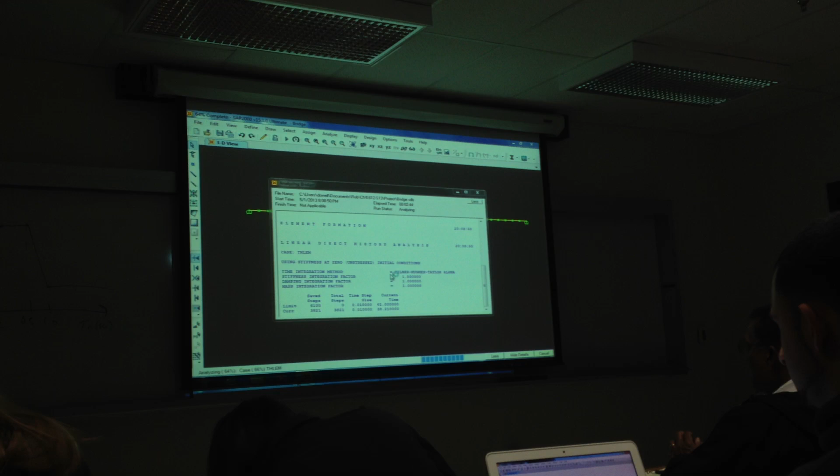And if not, I'll go over nonlinear here and then just do it. You can wait till it's done before you do it.

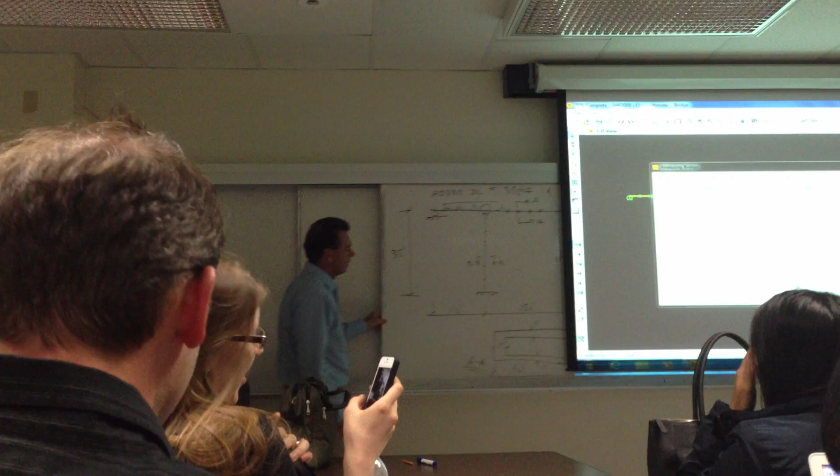Where is it? Oh, I think it's under here. Just the weight of the concrete here.

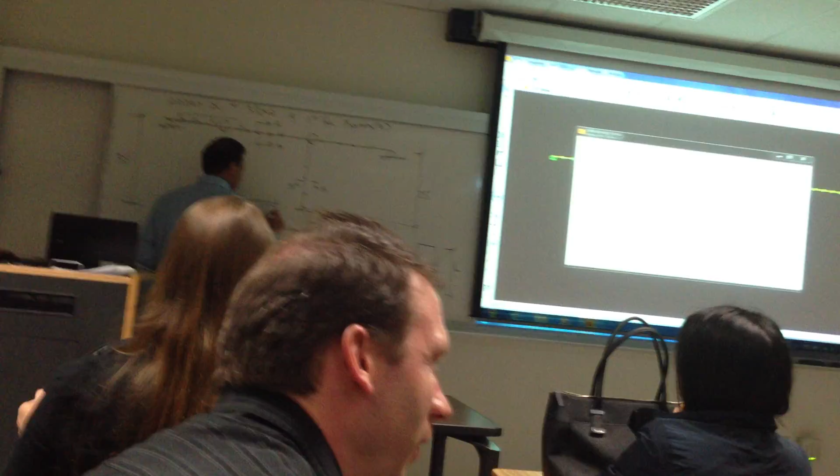So when we model it, though, we model all the way to here, right? Look at the thing, so that this post has a cross section here, in the analysis, goes all the way to there. Yeah, so what I did was, pretty much what you're saying, capture this extra weight, but you want to subtract out what's already there.

So what I did was I added this, going out 6 inches on both sides of this column. So you end up with solid, this is 5 feet, right? 'Cause this was 4 feet here. This is 5 feet, and then this distance here is this, which is 36 feet between this point and this.

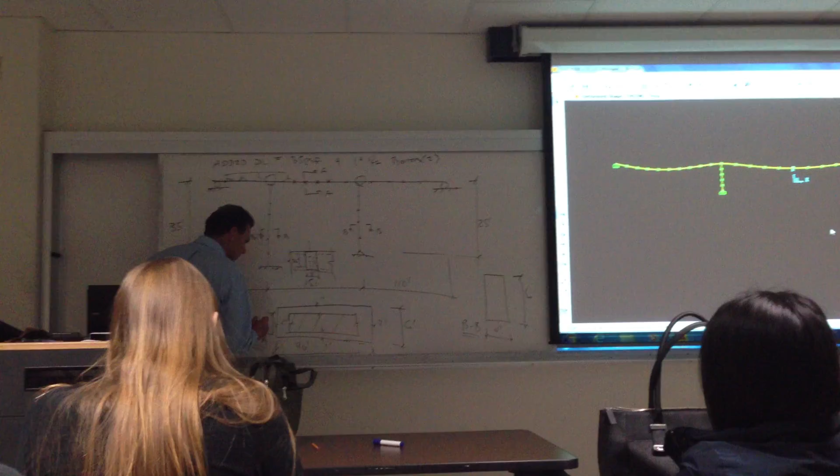What else? And then the height from here to here is 4 feet. So I just said 36 feet by 4 feet by 5 feet, that's the solid concrete that we weren't including. Multiplied by 0.15 kips per cubic foot, and that gave me a lump weight. That was the weight, and then I divided that by 32.2 to make that mass.

And in SAP, you have to add the weight and the mass separately. It doesn't, if you add the weight, it doesn't add the mass. Prove that to yourself, do it a little while. Is that clear? The cap only extends 6 inches on the sides of the column. In my design, typically, you don't have to go much further.

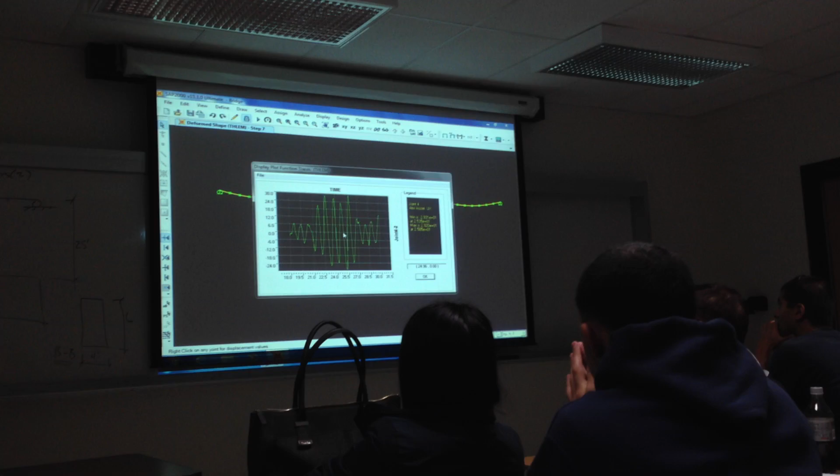Let's look at this. You can see the results, they look the same if you plot them on top of each other. They're probably like 99.9% the same time history trace. So it's the same response.

Of course, I would highly recommend when you do nonlinear to do direct integration, so it's good to go there. You can see here what we added to the dead load, put that on there, and then we ran the time history. All we have to do now is make it nonlinear. So on Monday, either way, if we're here or in the lab, that's what we'll be doing, adding nonlinear features and discussing.

Any questions? So start your projects, right? Sure. It's due when? On the day of the final.